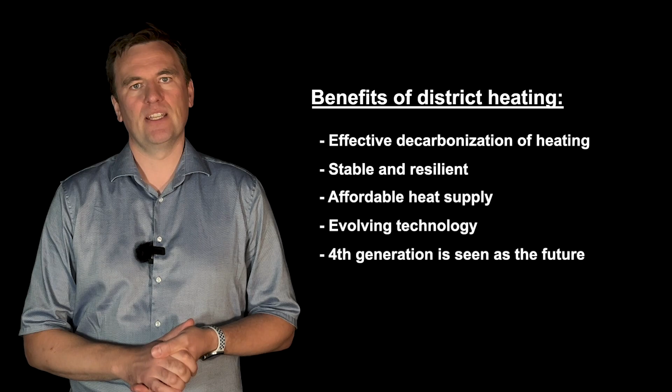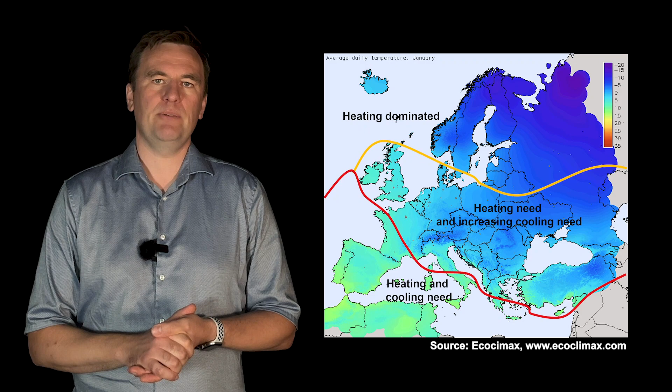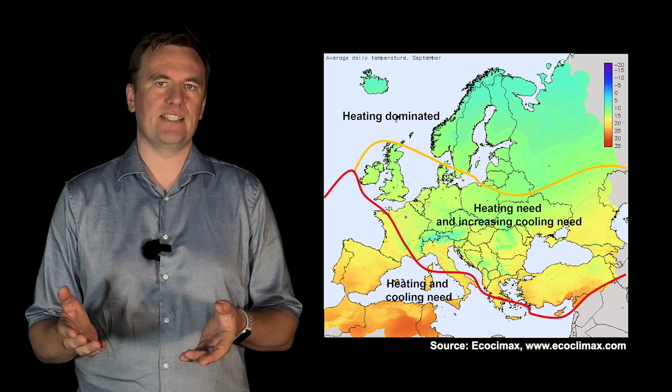District heating is recognized as an effective solution for decarbonizing building heating demands and provides stable and affordable heating. This has led to renewed interest and growth in this sector, particularly in Northern Europe, where fourth generation district heating is seen as the future-proof solution. In recent years, the technology has also been gaining momentum in Southern Europe. It is, however, a question how cooling demand in Southern Europe may impact optimal network design. This has led to an active search for solutions within the district heating space, and a partial merger with individual heat pump solutions in the form of the fifth generation district heating and cooling concept. However, as the fifth generation is to a large extent an individual-based supply system, it is losing out on many of the benefits the fourth generation offers.

This presentation focuses on the economic comparison of fourth and fifth generations, fulfilling both heating and cooling demands in Rome.

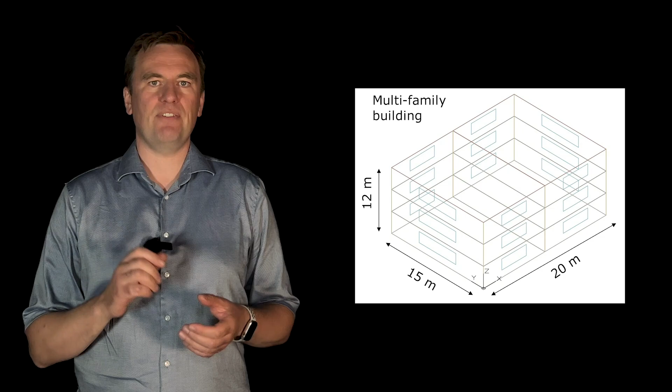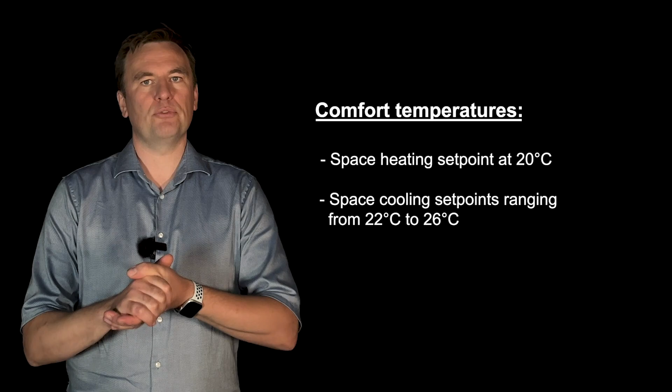For generating realistic heating and cooling demands, we used EnergyPlus, the model tool, to model typical new and existing six-flat multifamily buildings. The heating demands were simulated for a comfort temperature of 20 degrees, and cooling temperature of 22 to 26 degrees.

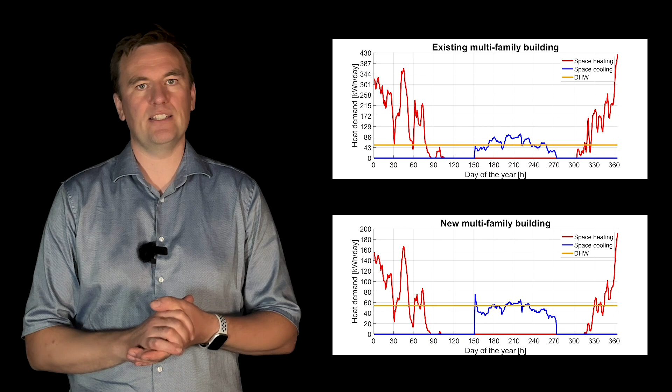When viewing the annual demands, it becomes clear that while there is no synergy between space heating and cooling demands, there is a good daily synergy between the domestic hot water demands and the space cooling demands. In the case of new multifamily buildings, the daily synergy potential is approximately 97%.

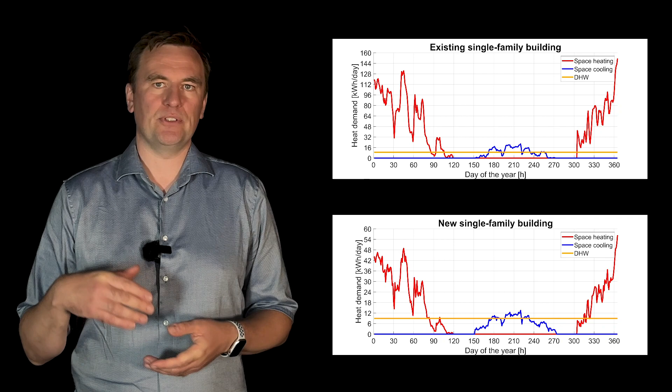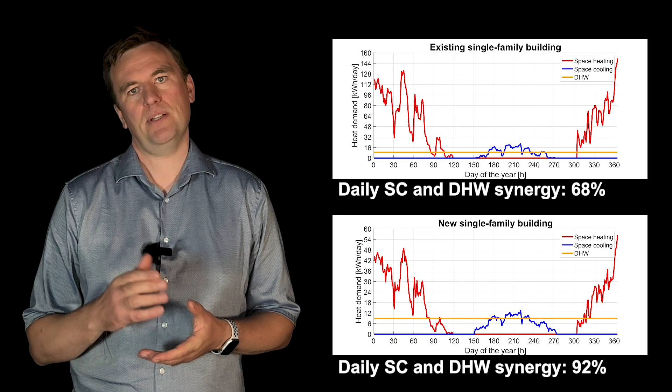In addition to the multifamily buildings, we made models for new and existing single-family buildings. The graphs shown here are based on a standard Italian cooling operation corresponding to an indoor temperature of 26 degrees. As with the multifamily building, there is a relatively good synergy potential between the domestic hot water demands and the space cooling demands, particularly in the case of new buildings.

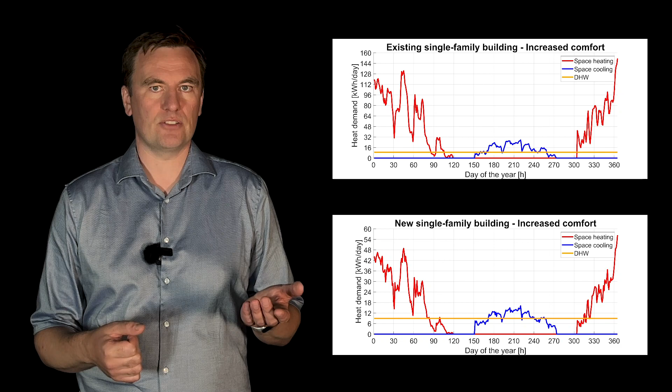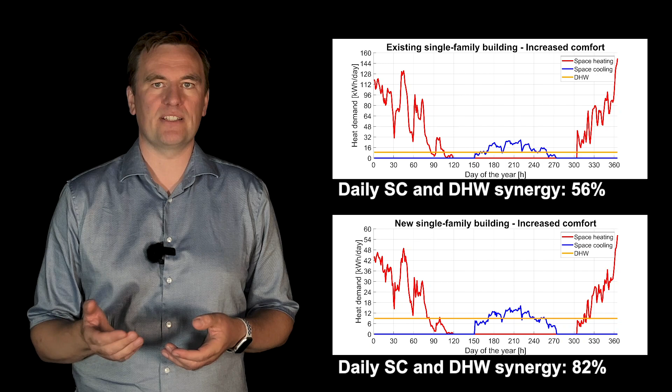In an effort to see the impact if the comfort cooling temperature would be lower, a new simulation was performed, where the comfort temperature was set at 24 degrees. The increased comfort level leads to increased waste heat and lower synergy potential. For instance, the synergy potential for existing buildings goes from 62 to 56%, and in new buildings it goes from 92 to 82%, which of course is still a good synergy potential.

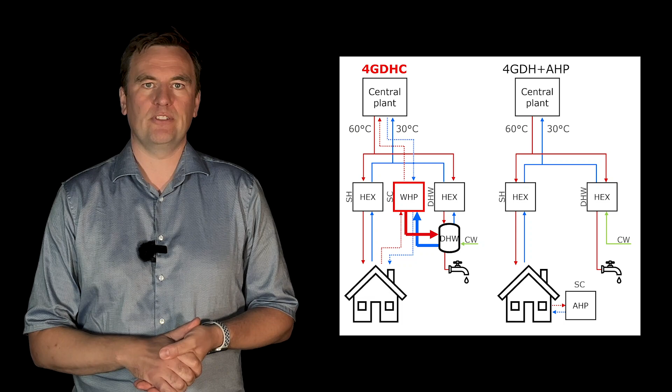In this study, we compared two fourth generation and two fifth generation variants, as shown here. The fourth generation variants are identical with respect to heating demands, but differ on how cooling demands are fulfilled. In the fourth generation district heating and cooling variant, the cooling demand is addressed using a cooling module, which is an add-on on the substation. The waste heat from this cooling operation is prioritized for fulfilling local domestic hot water demands, and any excess waste heat is injected into the district heating system. In the second fourth generation variant, the cooling demands are met by individual split units.

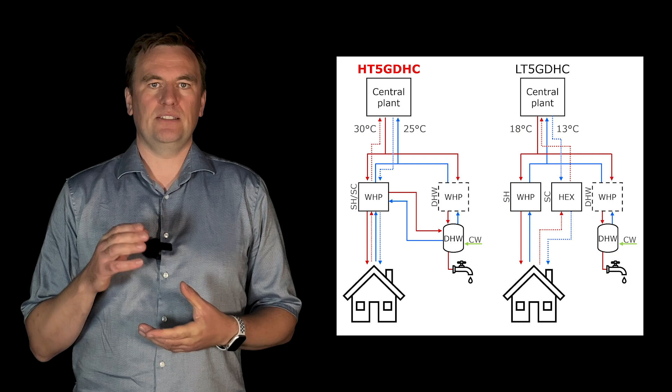As for the two fifth generation variants, we have a high temperature variant, where the operating temperature is maintained at a level favorable for heating mode operation of the building level heat pumps. To avoid excessive heat losses in this variant, it is designed with an insulated distribution network. And we have a low temperature variant with operating temperature around the ambient soil temperature. For this variant, it is assumed that the heat pump is only needed for fulfilling space heating and domestic hot water demands, and that the cooling demand can be fulfilled directly by the district heating grid.

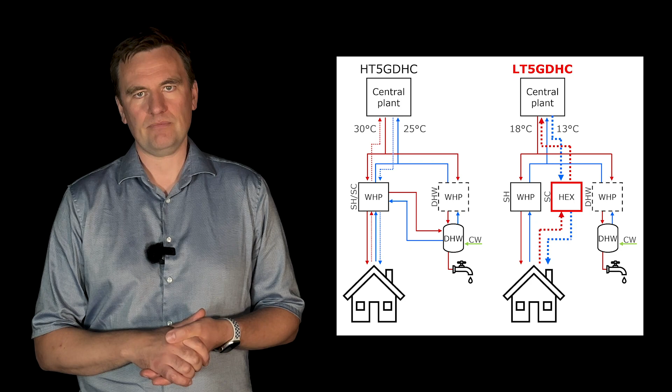Before we come to the techno-economic results, I want to mention that there is a general challenge with these types of studies, which is to ensure transparent techno-economic data. For that purpose, the study relies on data from various sources. We have the technology catalogs from the Danish Energy Agency, a lot of information from the Danish district heating utilities, information from Danfoss products, and we also use statistics on energy cost and purchasing power parities from Eurostat.

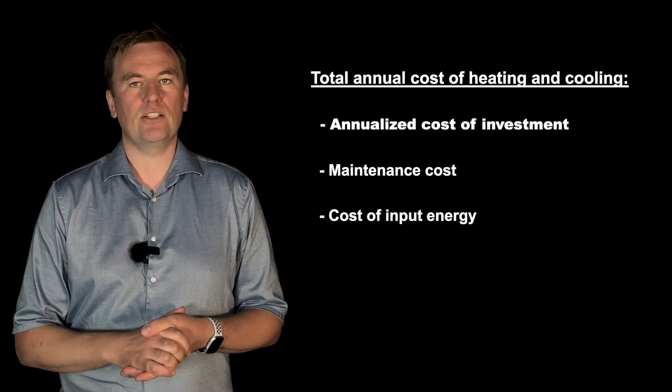While there will inevitably be uncertainty in the cost estimates, it is assumed that these uncertainties are similar across the different network concepts we are comparing. The comparison is made by comparing the total annual cost of heating, including the annualized cost of investments, cost of maintaining the system, and the cost of the input energy.

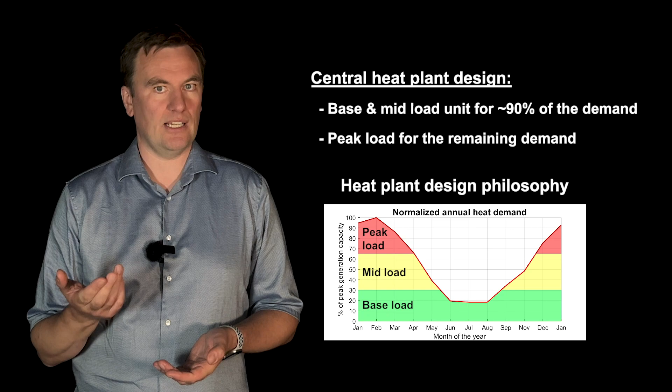We further differentiate between multifamily buildings in the fourth and fifth generation variants, as flat level heat pumps would simply be too expensive. Therefore, we assume that in the fifth generation systems, a basement heat pump is applied.

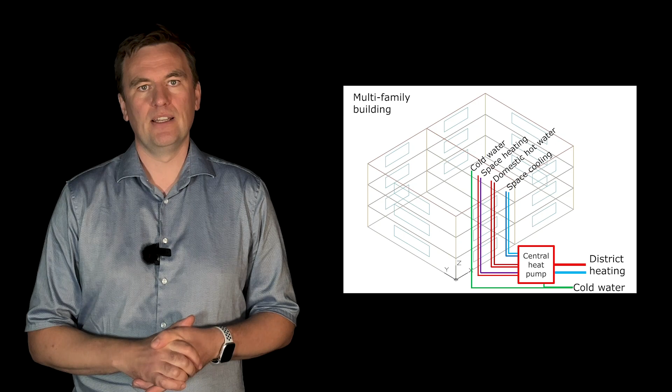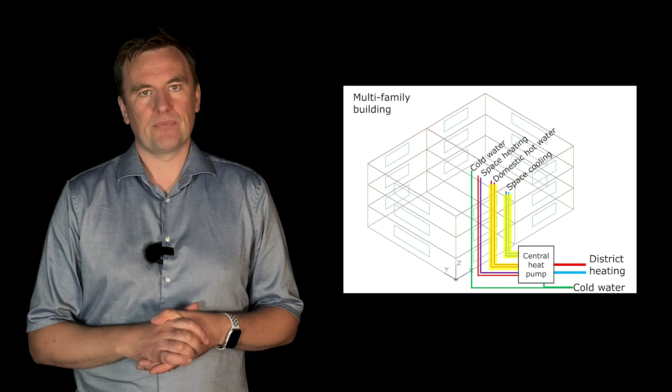This significantly reduces the end user heat pump costs in the fifth generation systems. We have further neglected the additional cost of riser pipe, manifolds and heat meters in each flat in the fifth generation multifamily buildings. Further, the heat or cool loss from these extra building pipelines are neglected.

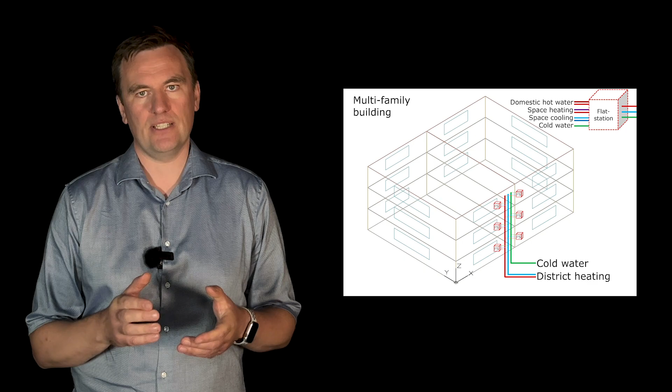For the fourth generation variant, we decided to go with flat stations in every flat and the cooling module accordingly, which in comparison to a central based equipment is a more expensive alternative.

Now let's dive into the results of the analysis, starting with the annual cost for the normal energy year scenario. The graph to the left shows the total annual cost for single family buildings, and the one to the right shows the total annual cost for multifamily buildings.

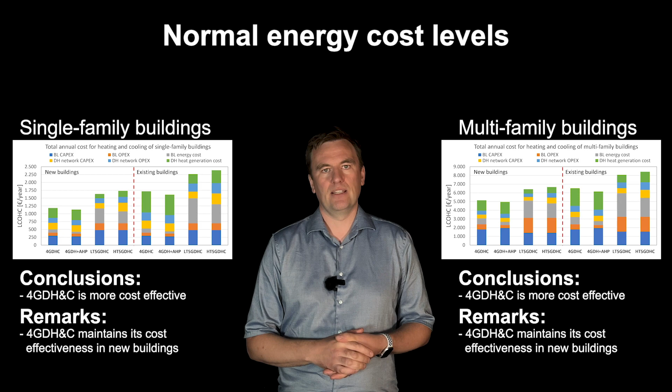What we can see is that in all cases the fourth generation variants are more economic than the fifth generation variants. Now, by breaking up the cost, we can identify the key economic differences between those variants.

Firstly, the largest difference is in the building level capex, where in the single family buildings the fourth generations are much more cost effective.

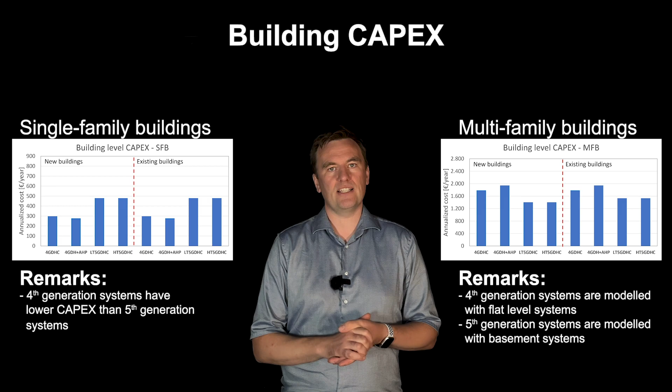In the multifamily buildings, we need to keep in mind that we are not comparing identical solutions, as the fourth generation applies flat stations, while in the fifth generation a basement level heat pump is applied, and that we ignore the additional cost of the pipes and riser pipes.

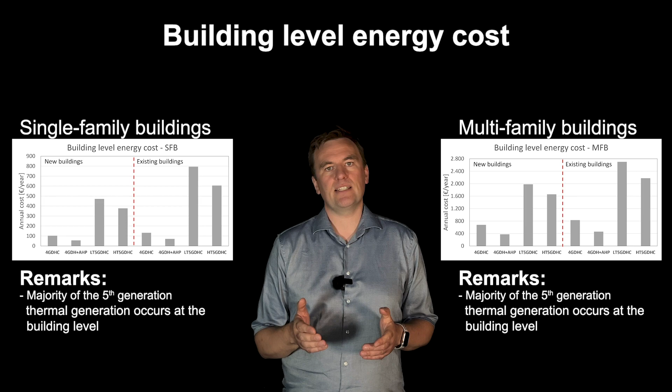Secondly, the building level energy costs are by nature much higher in the fifth generation compared to the fourth generation. This is normal, as a large part of the heat generation takes place in the building in the fifth generation. Thirdly, we can look at the district heating network capex, which includes the distribution network and service pipes.

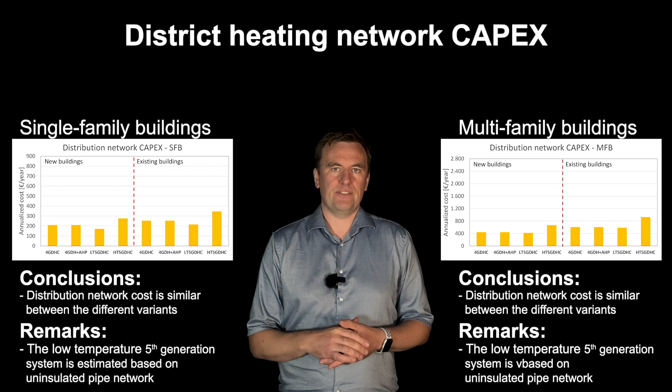What we can see here is that the annualized distribution cost is rather similar between the different network variants, with the uninsulated fifth generation pipe network slightly cheaper than in the other variants.

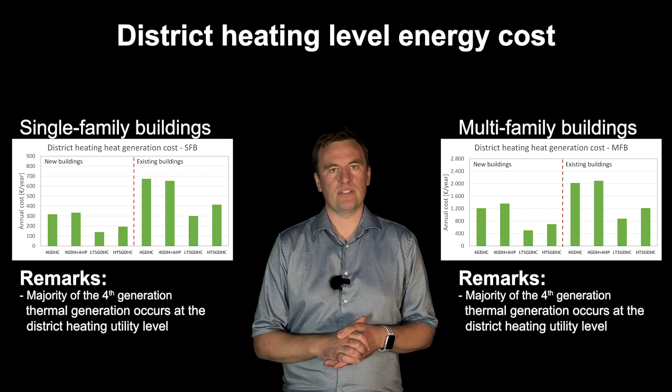Finally, we can consider the district heating heat generation cost, which includes the heat generation plant investments as well as the input energy cost. As expected, the district heating heat generation cost is much higher for the fourth generation than the fifth generation systems. But let's also look at a crisis scenario.

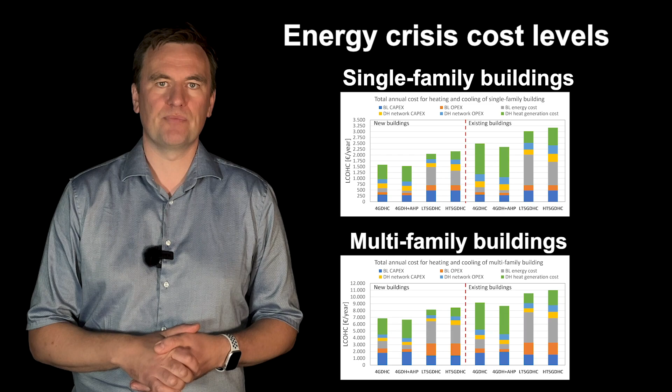When we increase the energy price levels corresponding to what we saw after the start of the Russia war on Ukraine, we can see that even if that would be a permanent condition, the fourth generation systems are much more cost effective.

But what is more important to consider is that in a properly designed fourth generation system, alternative heat generation plants would be applied along with the heat pumps, exactly to navigate varying energy supply situations and increase system resilience. This would be much less effective in the fifth generation systems, as most of the heat generation is performed at the building level, where there are no possibilities to change the supply system.

As for the potential next steps of this study, it would be natural to investigate some typical aspects of traditional district heating systems. For example, the potential impact a central thermal energy storage could have on system operation and economics, particularly if the heat generation would be operated with respect to power spot market prices, as well as if balancing services would be offered to the power sector.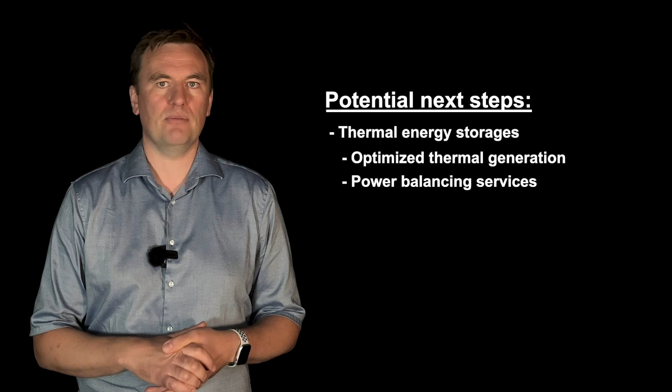It could further be interesting to explore some alternative heat sources, particularly waste heat sources with medium or high temperatures. It would also be good to extend the number of buildings and end user types beyond the current four types of residential buildings.

At last but not least, it would be interesting to team up with a partner in Southern Europe who could provide more details on local technology cost levels.